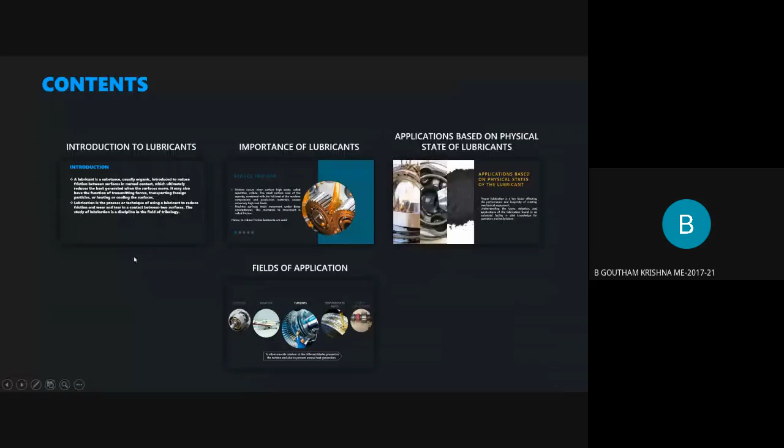So, first of all, what is lubricant? It is a substance, usually organic, introduced to reduce friction and wear between two mating surfaces. It also has other functions such as transmitting forces, heat absorption, etc. And lubrication is a process or technique in which we use a lubricant to reduce the friction and wear.

Coming to the importance of lubrication, first one is reduce friction. Friction occurs when two surfaces with asperities collide. The small surface area of the asperity along with the load of the mating surfaces create extremely high loads and they resist the movement. This is called friction. In order to reduce this friction, we use a lubricant. When there's a lubricant film present between two surfaces, as one surface slides over the other, the lubricant gets sheared off, and there'll be free movement, and there'll be no friction or very less friction.

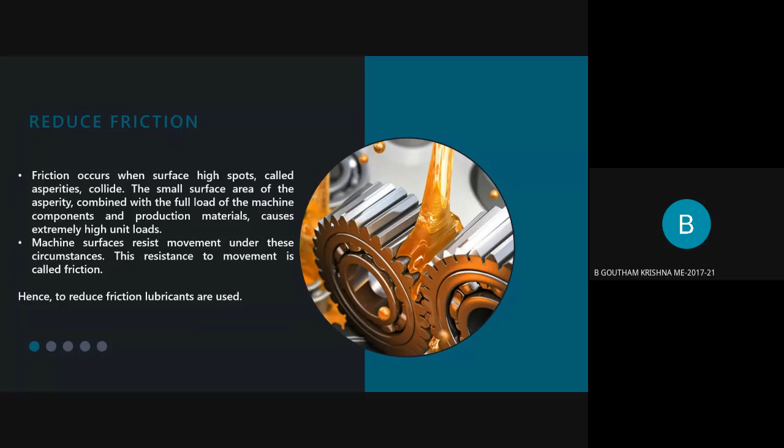As we know that when two surfaces interact with each other at high speeds, they are bound to wear, and this causes very small particles such as asperities to be formed on the surfaces that are formed when they are subjected to cutting, tear, fatigue, and weld. So this surface to surface mode occurs at a microscopic level, and at high speeds, the asperities wear off the top layer of the surfaces of the moving parts. So we use a lubricant so that the wear is reduced, and the period of the moving parts is prolonged.

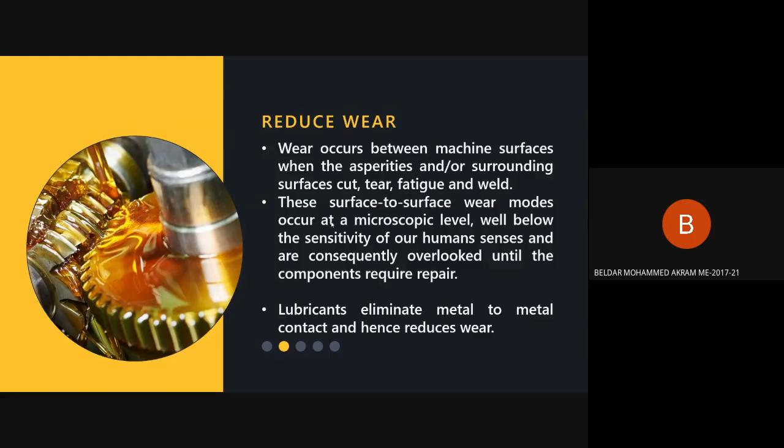Remove heat. Lubrication reduces the heat generated when two surfaces are in motion. It smooths the process by forming a film between two surfaces, thus reducing the friction and also improving the performance and efficiency.

To remove contaminants, lubricants are used as a circulation system which have benefits of carrying away the internally generated debris and external contaminants that get introduced into the system to a filter where they can be removed. So lubricants for machines that regularly generate debris or contaminants, such as automotive engines, typically contain detergent and dispersant additives to assist in debris and contaminant removal.

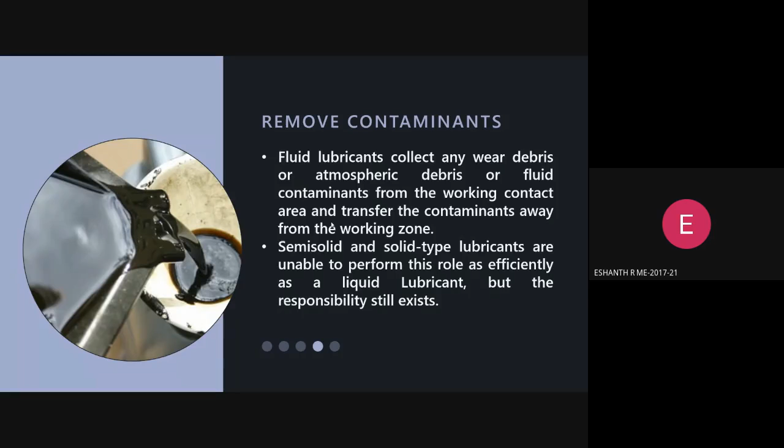In some moving parts you have a high concentration of chemicals. These concentrated chemicals usually cause corrosion. To prevent corrosion, by chemical corrosion or by high heat generated, the metals tend to get corroded. So to prevent corrosion, new lubricants are used, and these lubricants make sure that the corrosion doesn't happen by action of moisture and mild production environments. But the issue with this is if the lubricant is continuously used, once it ages, the lubricant itself tends to become corrosive. So the lubricants have to be changed now and then.

Coming to the application parts of lubricants. Eshanth, can you come back to the other slide?

Application based on physical state of lubricants. As we all know, proper lubrication is a key factor affecting the performance and longevity of any mechanical equipment because they have higher temperature and the revolving speed is very high. The moving parts of industrial machines experience a large amount of stress as part of their everyday operation. So one of the main factors that allow equipment to operate under such extreme circumstances is the lubrication, which is used to reduce friction between the moving surfaces. Now we'll look at the types of lubricants.

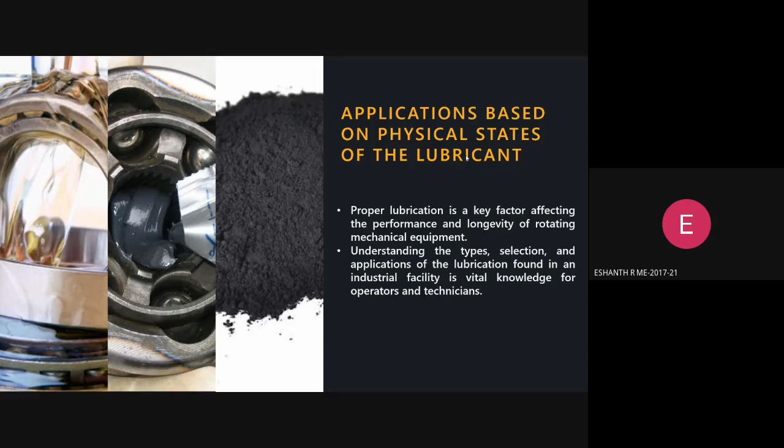Along with their applications. So the first type are liquid lubricants, also called oils or lubrication oils. There are several types of lubricating oils used in industrial applications, each having their own advantages and disadvantages.

First is mineral oils. Mineral oils are composed of a complex mixture of hydrocarbons and are produced by processing crude oil or petroleum oil. One of their main advantages is they're produced on a large scale basis, so they're comparatively cheaper.

Next comes synthetic oils, which are man-made using organic chemicals. They have a lot of advantages as they work at both high and low temperatures, with better chemical stability and better resistance to oxidation, etc. But they're slightly more expensive than mineral oils.

Fixed oils are biolubricants, usually made from animal or vegetable sources. They're rarely used on their own, but are majorly used as additives in mineral oils and greases.

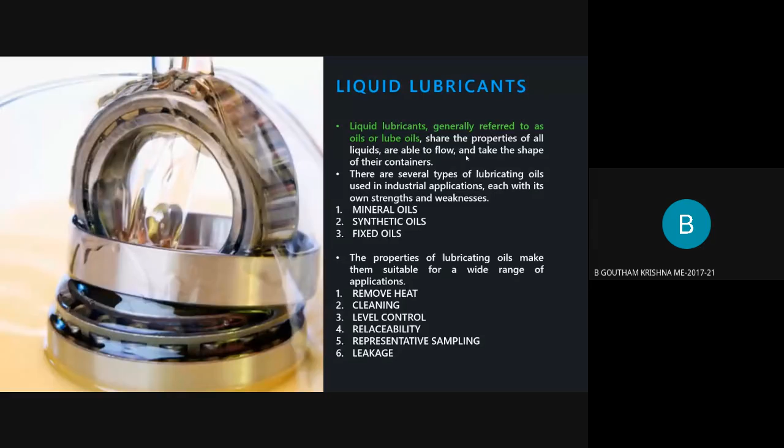Next, the semi-solid lubricants, commonly known as greases. Greases are actually much more preferred when compared to oils because sometimes you want the lubricant to stick to a component, while other lubricants like oil do not actually stick to the parts. So greases will stick to the applied surfaces, even vertical surfaces.

This is independent of a pumping system, unlike oil which has to be pumped into the system. Grease will stick to the component, and it will also make sure the asperities stay inside the boundary layer, which makes sure it doesn't spoil the moving parts or subject them to wear.

And greases are not subjected to leakage because they don't move so freely compared to oil. As they have the name semi-solid, they actually sit inside the moving parts fixed, and they mate the gears as well.

Sealant is also a type of grease that can be packed around the component, which acts as a barrier to prevent contamination of the parts. You can also have a grease chamber, which is not possible for an oil chamber.

These greases are commonly used in automobiles and industrial purposes, as we see them every time, and in construction equipment, which is the most used area for greases. In cables and wires, they're used to make sure they don't get subjected to heat, so that they don't break.

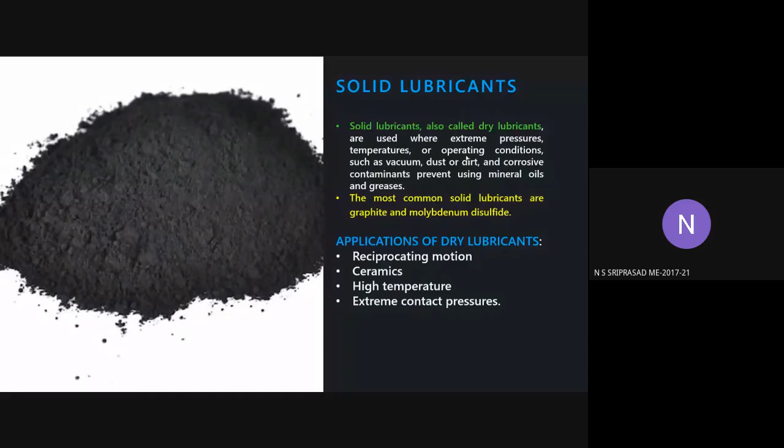Or they are mixed with some industrial alcohol, which is very volatile. So once it's sprayed onto whatever component, the alcohol evaporates, leaving behind the solid dry lubricant there. Applications include reciprocating motion, ceramics, and high temperature areas.

Now moving on to the field of applications.

Turbine lubricants must control the rust and corrosion that can destroy the precise surfaces, and must also resist foaming and air contaminants, which could impair lubrication and lead to equipment breakdown. They should also be easily filterable without additive depletion, and versatile enough to serve as both lubricating oil and hydraulic fluid for various turbine systems.

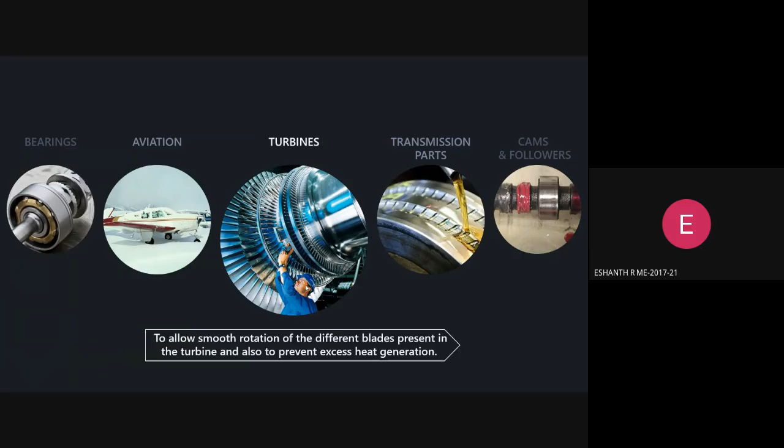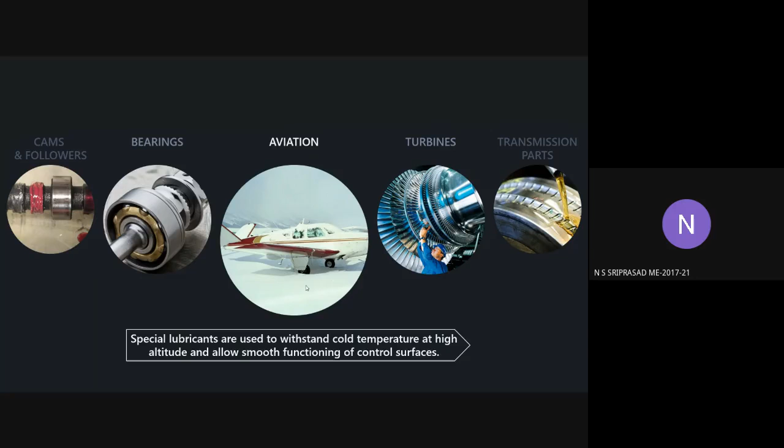Now for planes, since they usually fly at high altitudes where the temperature is really low, most fluids there freeze. To prevent that, you need to choose particular lubricants that, even at low temperatures, don't have a high freezing point—the freezing point should be really low. This way lubricants ensure the smooth functioning of the actuators for control surfaces such as the rudder, elevator, and ailerons.

Coming to bearings: all bearings, such as roller bearings, plain slider bearings, or general bearings, usually take up heavy loads, and as a result undergo metal to metal contact, which results in wear. Due to wear, the clearance of the bearings increases, which in turn reduces the load carrying capacity.

In order to eliminate this, we use lubricant. They form a film in between the two metal contact surfaces and reduce wear and vibrations.

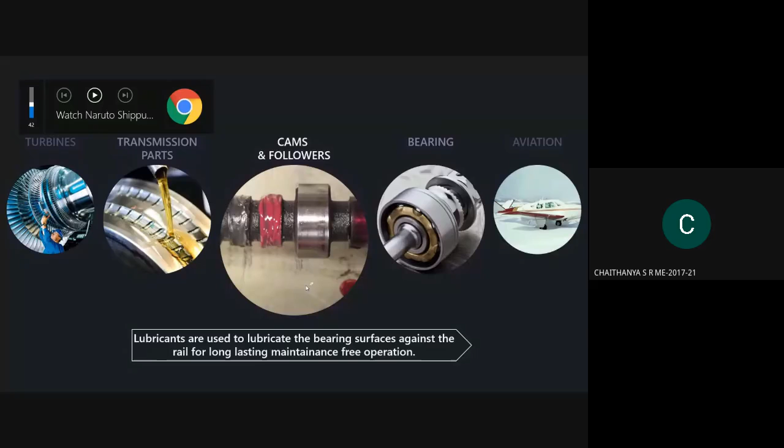Cams and followers are used to transmit rotary motion and reciprocating motion. These components are subjected to jerks in sliding distance, which leads to pits forming on the cam surface. To reduce this, we use lubrication, which reduces abrasive and adhesive wear between the cam and follower. It also reduces temperature and prevents scuffing between cam and follower, removes contaminants, and reduces noise.

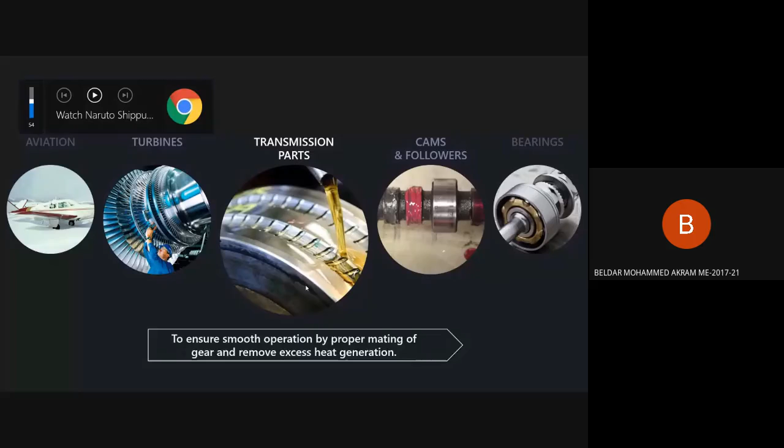Transmission parts, commonly known as the gearbox system, are found in automobiles. In automobiles, we use lubricants known as engine oil, which ensures the smooth working of parts in the gearbox. This reduces friction and reduces internal heat generation of the transmission parts, as an automobile is subjected to constant varying speed at varying time.

A constant flow of engine oil should be present, and since parts are subjected to high temperatures, the viscosity of the oil shouldn't decrease, so it doesn't become too thin. At cold temperatures, the engine oil shouldn't become too hard.

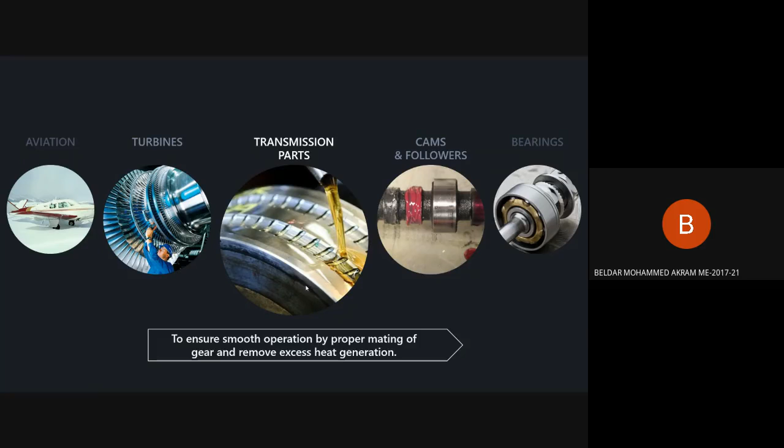These are only a few fields, ma'am. There are other fields also which we couldn't mention, because there are a huge number of fields. That's all, thank you ma'am.

What's your team number before starting, Kanishka? We don't know the number, Sumanth. It's okay, the title is Classification and Mechanism of Wear. Good afternoon to one and all.

So our topic for today is classification of wear and mechanism of wear. The different classifications of wear mechanisms are abrasive wear, adhesive wear, cavitation, corrosive wear, erosive wear, fatigue, and fretting wear. These are the most common types.

Go back to the previous slide just a second. Sorry for disturbing you. I just need to take down the USN numbers: 22, 37, 44, and 51.

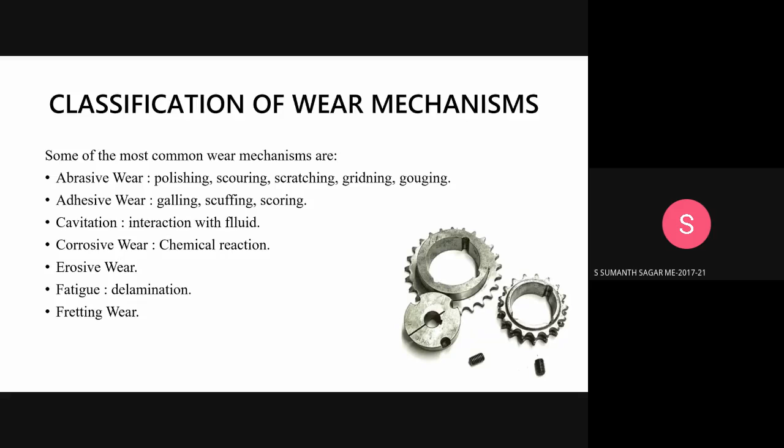Yeah, go ahead. So these are the most common types of wear mechanisms that we see in everyday mechanical components. So coming to adhesive wear.

Adhesive wear occurs when two solids, one of a harder material and one of a softer material, are in sliding contact, and the atomic bonding forces occurring between the materials at the interface are stronger than the strength of the surrounding area in either of the materials.

So basically, there's a harder material and a softer material which are in contact with each other, in sliding contact in this case. So the interface between them, where the two meet, is stronger than the strength of the surrounding area.

And adhesive wear is one of the most frequently encountered types of wear.

In adhesive wear, basically what happens is the shear starts in the weakest material, that is, the wear basically happens in the softer material. Excuse me Sumanth, could you take it a little slow please? Yeah, sorry. In adhesive wear, shear starts in the weakest material, and the fragment of a surface, that is the wear particle, is detached from one body and transferred to another, as you can see in this animation here.

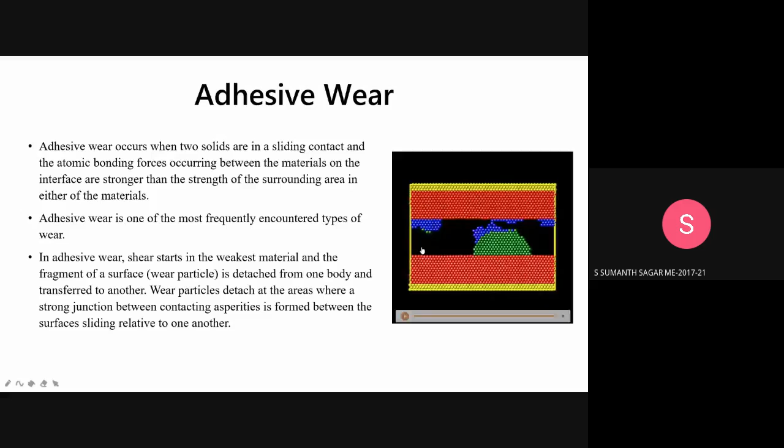So this green substance is the hard material, and the blue is the softer material. What happens here is when these two are in sliding contact, the atoms from the softer material are detached from the softer material and transferred onto the harder substance. So that's what's explained here, and this is how the mechanism basically works.

So if I have to explain the mechanism here: when two materials are in contact, due to the high pressure and stress between them, a micro weld is formed because of the high temperatures in the contacting asperities. These two are basically glued together, and when they slide off against each other, the softer material loses whatever was at the contact point, and this material is transferred onto the hard material. That's what the mechanism is basically saying.

And adhesive wear coefficients of materials are between 10 power minus 7 and 10 power minus 2, depending on the operational conditions and material properties. This is about adhesive wear.

And moving on to abrasive wear. Prajwal, are you there? Yeah, good afternoon ma'am, I'll be explaining abrasive wear.

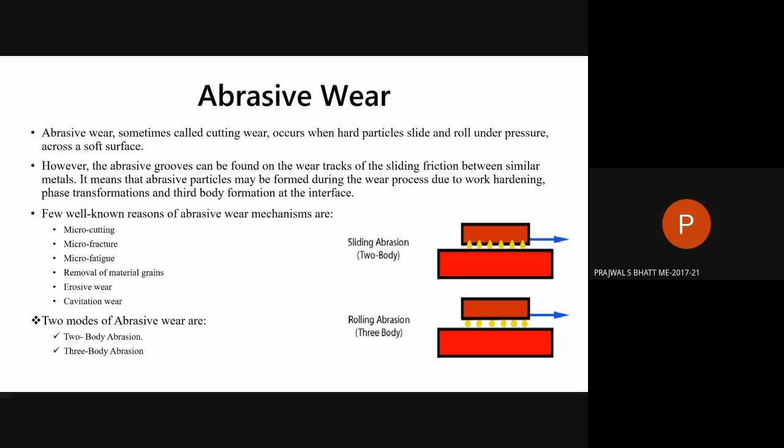The well known reasons for abrasive wear mechanisms mentioned below include micro cutting, micro fracture, micro fatigue, etc. And in abrasive wear, there are two modes of wear. Sumanth, next slide.

The first one is two-body abrasion, which occurs between two materials in contact, and as mentioned earlier, one of them is harder than the other. The normal load applied forces the harder particles to penetrate into the softer surface, which in turn causes plastic deformations. As the harder surface slides over the softer surface, material is removed from the softer surface by microplowing and microcutting, which is one of the most common mechanisms, as mentioned earlier.

And the other mode of abrasive wear is explained in the next slide.

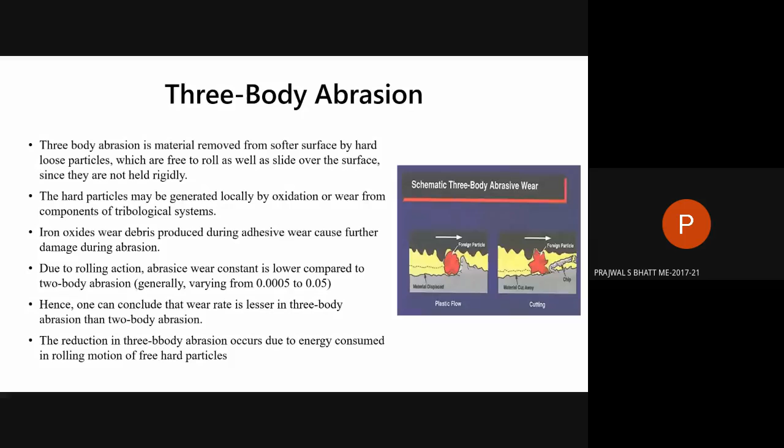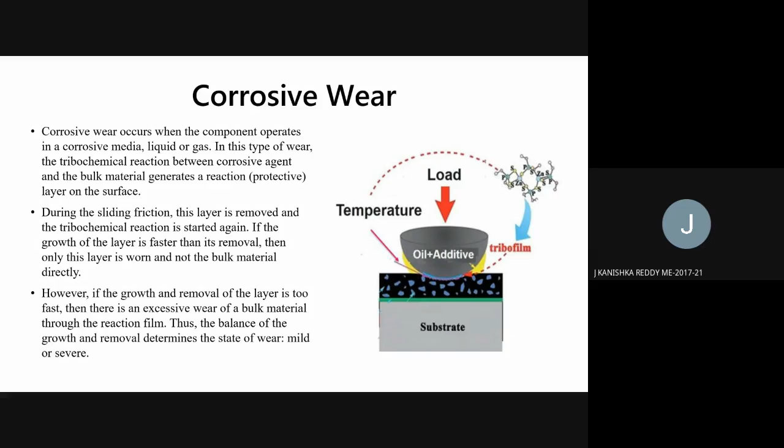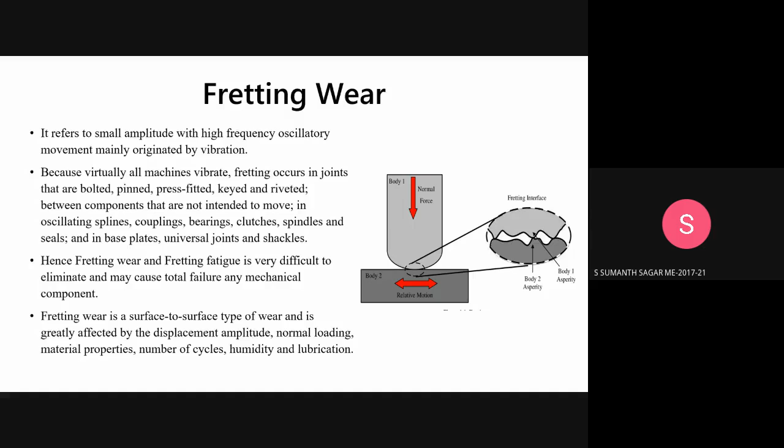Okay, so well presented. Your title was classification and mechanism of wear. So what did you understand by going through this topic and doing your groundwork for your presentation?

We understood the different types of wear and how wear occurs in different materials and how bad of an effect it can have on everyday components that we use. Like even the most robust components we use can go through a bad cycle because of wear. And usually, when people think of wear, they only think of sliding and rolling friction, ma'am, whereas there are these different types of wear. That's what we found out when we did this.

Okay, so now you're aware of all the classifications of wear which could come in when you have some relative motion across the contact area. So again, it depends upon the material. Can you figure out which are the major causes of wear, which is highly impacted across the surface as a drawback, and which could be overcome with the help of lubricants? So can you tell me which are worse in this situation, which have the major impact, and which are minor, associated with the types of wear you discussed currently?

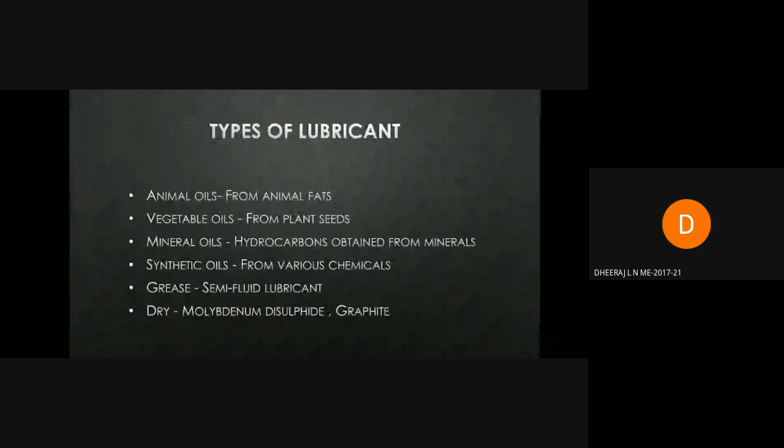Greases, semi-fluid lubricants, dry or solid lubricants, meaning molybdenum disulfide or graphites. Chetan, next slide.

Solid lubricants are also called dry lubricants. These are materials that, despite being in a solid phase, are able to reduce friction between two surfaces sliding against each other without need for a liquid oil medium. The two main solid lubricants are graphite and molybdenum disulfide.

Semi-solid lubricants, which is the most important, means greases, waxes, and other components of oil and fats.

Liquid lubricants are used extensively in applications in terms of speed and load size. Liquid lubricants are the most dominant type of lubricants in the market.

Next, synthetic lubricants, which are chemical compounds that are artificially made. Synthetic lubricants can be manufactured using chemically modified petroleum components rather than whole crude oil, but can also be synthesized from other raw materials. Next, I'm handing it to Anil Kumar.

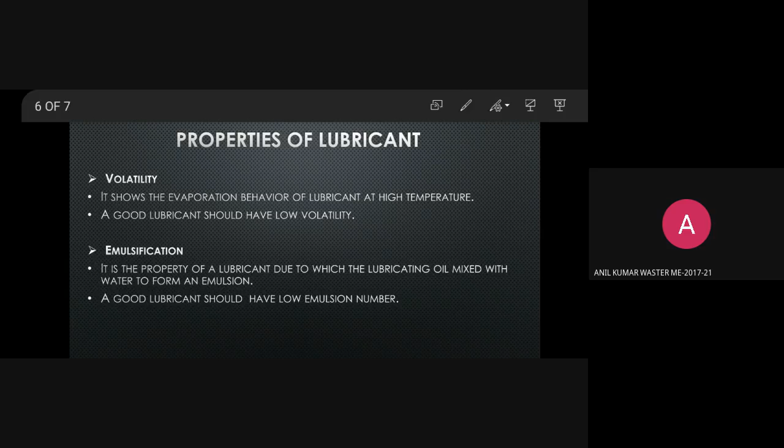Thermal stability. All oils have the tendency to decompose at higher temperature. The ability to resist decomposition due to high temperatures is known as thermal stability. The good lubricant should not decompose during operation at high temperature, and it must be stable towards heat.

The next property is volatility. Volatility is the evaporation behavior of the lubricant at high temperature. When the lubricating oil is used in very heavy machinery working at high temperature, a portion of oil may vaporize, leaving behind the residual oil. This residual oil has different lubricating properties, like increased viscosity. Therefore, the good lubricant should have very less volatility.

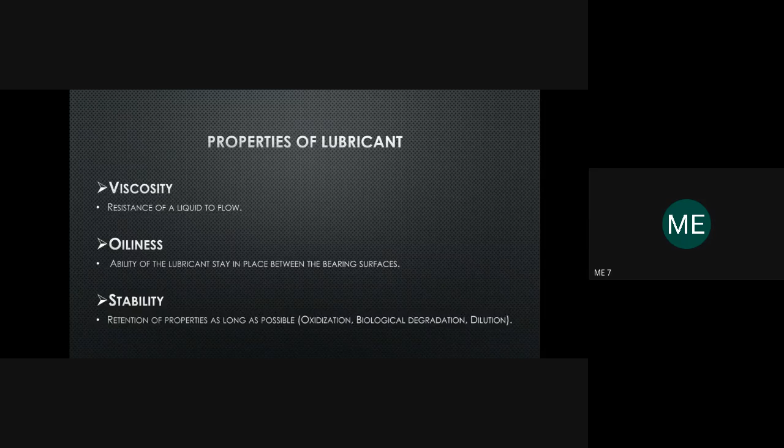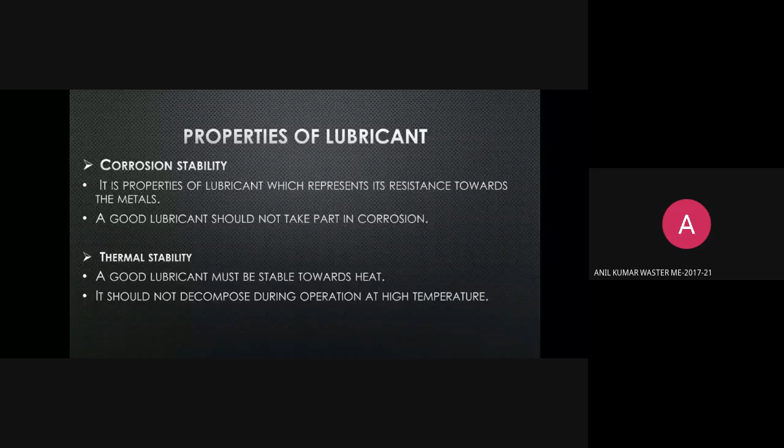There are some key properties, like viscosity, stability, and oiliness. In bearings of automobiles, there will be high load, so we need high viscosity and oiliness of the lubricant.

Still, if you would have had one case study, that would have been better. Try to do a little bit of groundwork further so it provides you knowledge on which lubricant you can select for which type of requirement, as I told you in class with some examples. I thought you would give case studies related to all types of lubricants, which fetches more information for real time requirements, because usually there'll be a huge lot of specifications for every grade of lubricant. So based on your requirement you see whether the specification is mapping and go with that grade of viscosity lubricant. It depends on what set of properties you need for a specific requirement, so based on those properties you select the grade of available viscosity of the lubricant.

Selecting becomes difficult if you don't have scheduled data with you. So if you do the minimum groundwork before purchasing a lubricant, you know the availability mapping as per your requirement, and you can directly go purchase the required lubricant. If you go wrong in selecting the lubricant, even though the design of the bearing is good, the material selection is good, and the load applied is completely bearable, the reliability of that bearing will come down, the life of that will come down. So you should be very careful in selecting the lubricant. These properties and types play a very vital role, so you should be keen enough and go with some real time applications.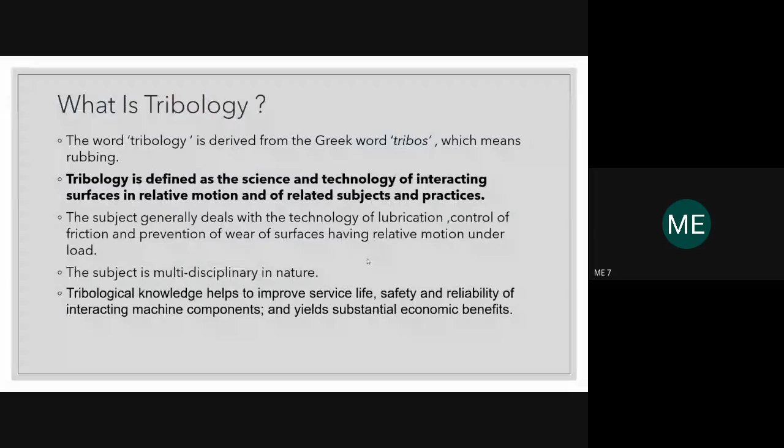Now coming to the question, what is tribology first? Tribology is the science that deals with friction, lubrication, and wear of surfaces which have relative motion with each other. The word tribology comes from the Greek word tribos, which means rubbing.

Tribology is an interdisciplinary subject which has elements of fluid mechanics, solid mechanics, material science, chemistry, and thermodynamics. The knowledge of tribology has led to the development of better materials and lubricants, which help in reducing friction and wear in mechanical and electromechanical systems, which right now are a major bane in our modern society as they lead to inefficiencies and loss of energy.

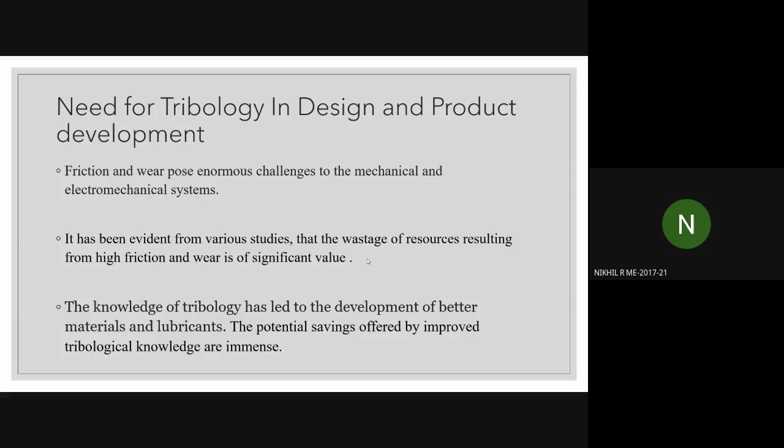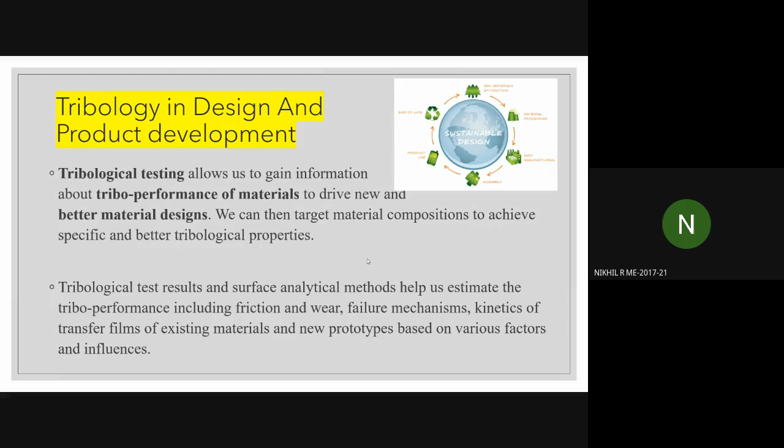Tribology in design and product development: the testing which we do under tribology helps us understand how materials wear on rubbing with each other and how friction acts when two materials have relative motion with each other. This also helps us understand what type of lubricants we need to use in a particular situation to reduce wear and friction so we can get more efficiency and reduce wastage of energy.

Tribology is mostly concerned with optimizing the contact surfaces to prevent wear, and the material used between the contacting surfaces has a major impact on how each surface reacts when force is applied, depending on the stresses applied. The use of friction and wear optimized materials can greatly improve industries as they can reduce the downtime and maintenance required on machines.

Now Balaji will give a brief introduction on the various applications of tribology. Thank you Nikhil. Tribology plays a very big role in our day-to-day lives, with applications in various fields such as automobiles, drilling and hardware equipment manufacturing, biomedicals, aerospace, aeronautics, racecrafts and many other fields. The main application of tribology in design comes down to bearings, gears, cams, brakes, and seals.

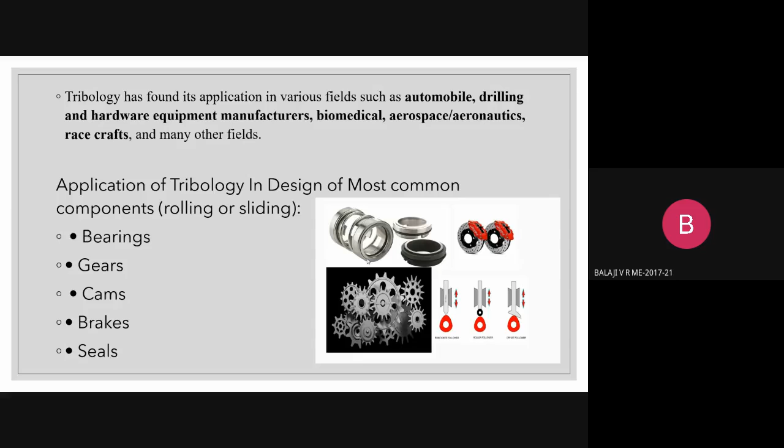Talking about bearings, in mechanical systems, bearings are used for supporting various rotating elements like shafts, etc. A special feature of journal bearings is that it makes metal to metal contact only in two conditions: at the start of rotation and at the end of rotation. Only in these two conditions does wear of journal bearings occur and is maximum and significant. Often such failures occur in absence of sufficient lubricant hydrodynamic film thickness due to relatively low speed.

Learning tribology cultivates an understanding that at low speeds, the main purpose of oil is lubrication, and high viscosity oil will be preferred to low viscosity oil. While at high speeds, the major purpose of oil is to act as a coolant, and low viscosity lubricants are preferred to carry away frictional heat of operation. Here, lubrication is a secondary consideration.

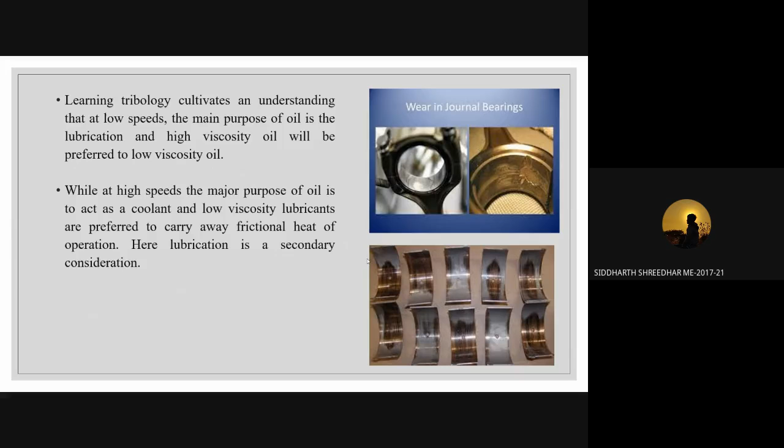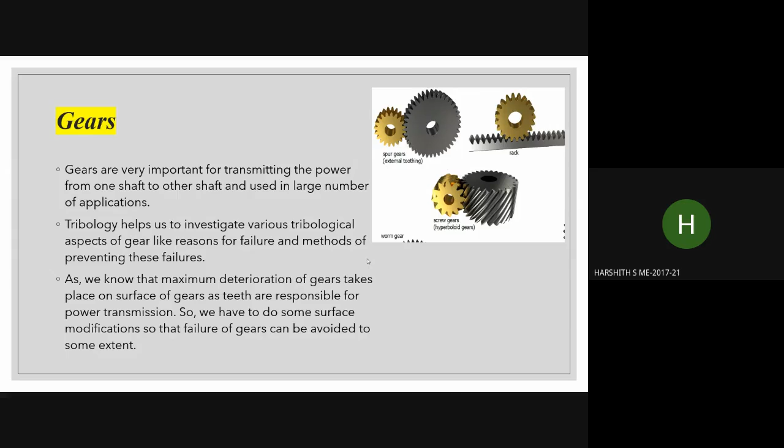Gears are very important for transmitting power from one shaft to another. Tribology helps us investigate the various tribological aspects of gears and the reasons for failure, and preventing these failures. As we know, maximum deterioration of gears takes place on the surface of gears as teeth are responsible for power transmission.

Gear failure takes place when the teeth lose their shape. Major causes of gear failure are friction and scuffing, and this can be avoided by using lubricants or harder gear profiles or different coatings on the gear tooth.

So cams are components that are used to transmit rotary motion into reciprocating motion. These components are subjected to many cycles of usage and tend to fail with increasing usage. One such failure is pits formed on the cam surface. These pits can increase noise pollution and reduce mechanical efficiency to a greater extent. Tribology as a subject helps us realize what are the limitations of such components and helps us increase their efficiency in any way possible.

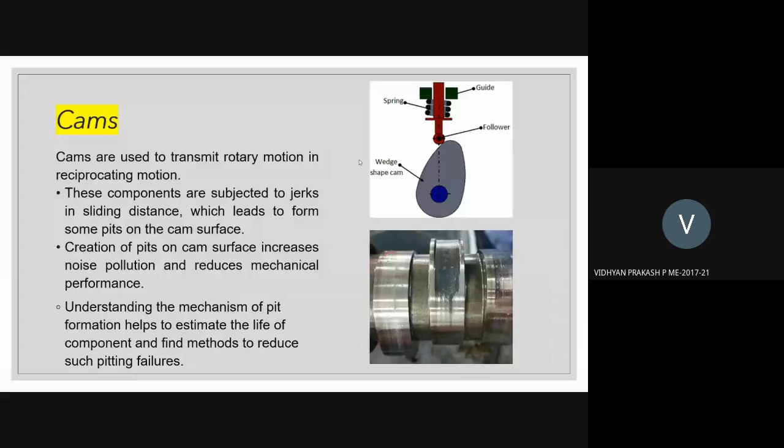Mechanical seals are devices that join systems or mechanisms together and prevent any kind of leakage, or protect the system from any contamination. The effectiveness of a seal is dependent on adhesion in the case of a sealant and compression in the case of a gasket. The possible failures are adhesion wear in the case of sealant and failure of the gasket. Tribology helps us understand these causes of wear and prevent them, and hence increase its efficiency.

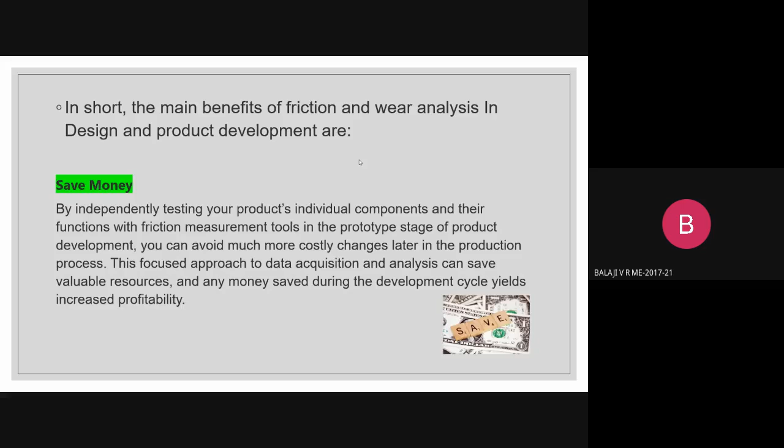So, in short, tribology is very important in our lives, and there are many benefits. Some of them are saving money. In any industry, money is of utmost importance, so if someone does frictional analysis on a prototype before the product is even developed, we can save a lot of money by solving any problems that occur. It'll also help save time because frictional analysis provides fast, accurate, and reliable measurements, and helps manufacturers develop their product quicker. Product quality can also be improved because we can see where wear is increasing and improve the product while still in the prototype stage.

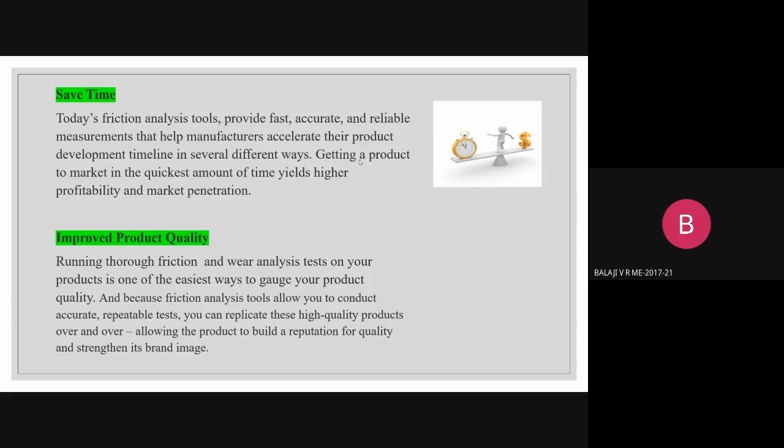As we do frictional analysis, we can also improve and get to know about our product. As we keep developing, we'll have a lot of product knowledge, which will help us streamline the product and, at the end of the day, make something better for society. Thank you.

Hello. Okay, it was a good effort from your end. I think the title was Importance of Tribology in Design and Product Development, right? So what knowledge did you gain? What is the basic importance of tribology if you want to design any new product? Suppose you want to design a new pen as per some innovative concepts, what is the impact of tribology on designing a new pen? Can you give me an example for this?

Mr. Balaji was very happy in presenting. Can you please answer me now, so that even I'll be happy? Yeah, Ma'am, as Balaji explained in the last slide, there were four main benefits of this in product design and product development.

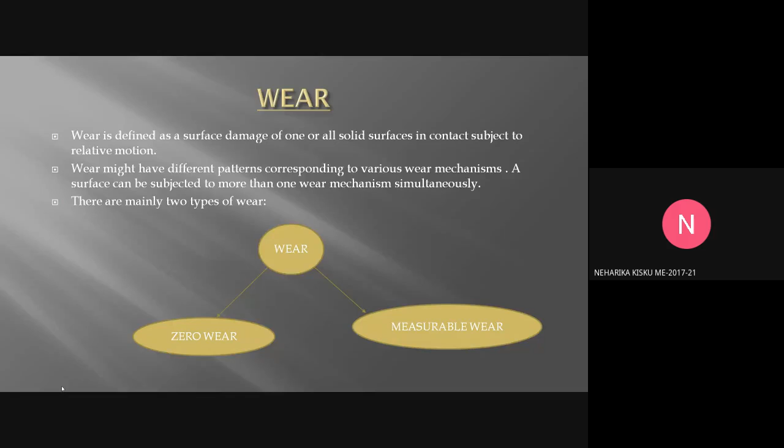Zero wear is basically a polishing process in which the asperities of the contacting surfaces are gradually worn off until a very fine smooth surface develops. It may increase the performance, or it can be considered as a desirable one.

Let's understand measurable wear. It can be a removal of material from the surface that increases vibration, noise, or surface roughness, and this may be treated as measurable wear. Often we measure wear in terms of volume or mass reduction. The undesirable removal of materials occurs in measurable wear.

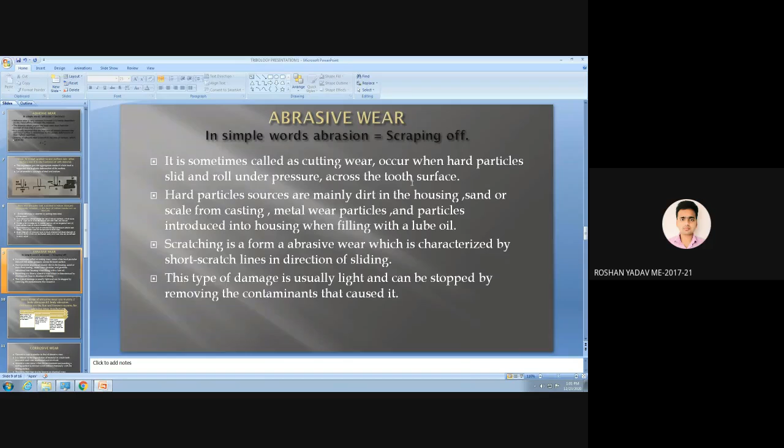We can observe this when we take the example of a rolling bearing. While in a rolling bearing, if we take lubrication and with the lubrication some particles are going into the bearing, it may start damaging through wear.

Scratching is a form of abrasive wear which is characterized by short scratch lines in the direction of sliding. This type of damage is usually light and can be stopped by removing the contaminants that caused it. The basic modes of abrasive wear are mainly of two types, two-body abrasion and three-body abrasion, which was covered by another group, so we didn't talk much about that.

Following are a few well-known reasons for the abrasive wear mechanism. Micro cutting: sharp material cuts the softer surface, and the cut is removed as wear debris. Micro fracture generally occurs in brittle materials; fracture occurs due to merging of a number of smaller cracks. Micro fatigue: when a ductile material is rubbed by a blunt piece, the surface is repeatedly loaded and unloaded, and the failure occurs as fatigue.

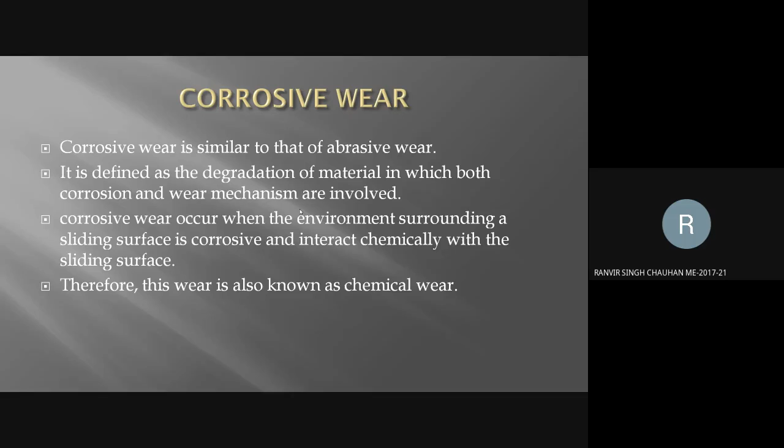Corrosive wear is similar to abrasive wear. It is defined as the degradation of material in which both corrosion and wear mechanisms are involved. Corrosive wear occurs when the environment surrounding a sliding surface is corrosive and interacts chemically with the sliding surface. Therefore, this wear is also known as chemical wear. Roshan, next slide.

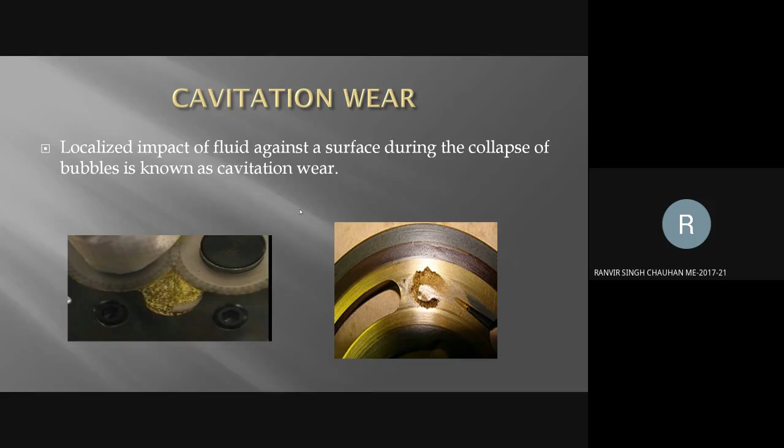Now, cavitation wear: the localized impact of fluid against a surface during the collapse of bubbles is known as cavitation wear. Now, erosive wear: the damage produced by sharp particles impinging on an object is called erosive wear. Particles in water eroding the rocks over which a river flows, or the erosion of both rope and stone pulley when the rope continuously slides over the pulley, are some common examples of erosive wear.

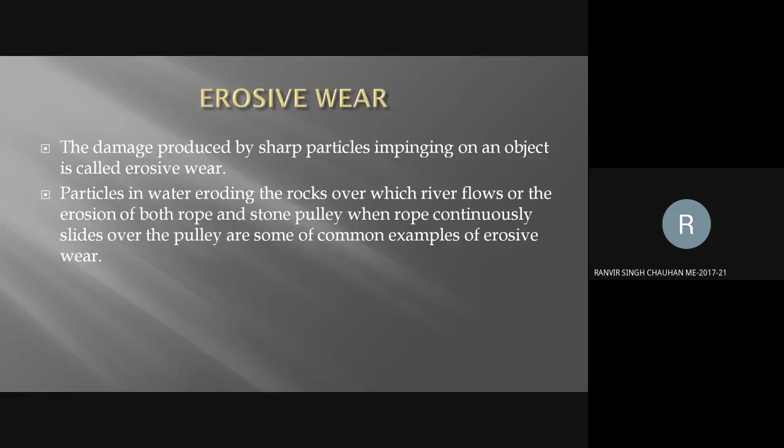Now fretting wear. Fretting is a small amplitude oscillatory movement that occurs between contact surfaces which are usually nominally at rest. One of the immediate consequences of this process in normal atmospheric conditions is the production of oxide debris. Hence, the term fretting wear or fretting corrosion is applied to this phenomenon.

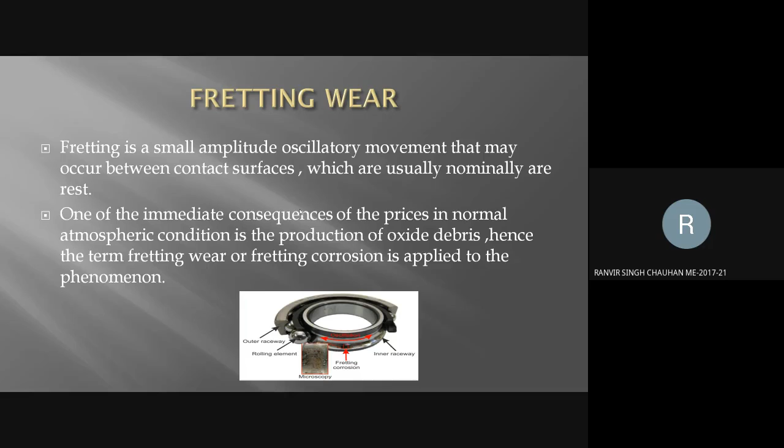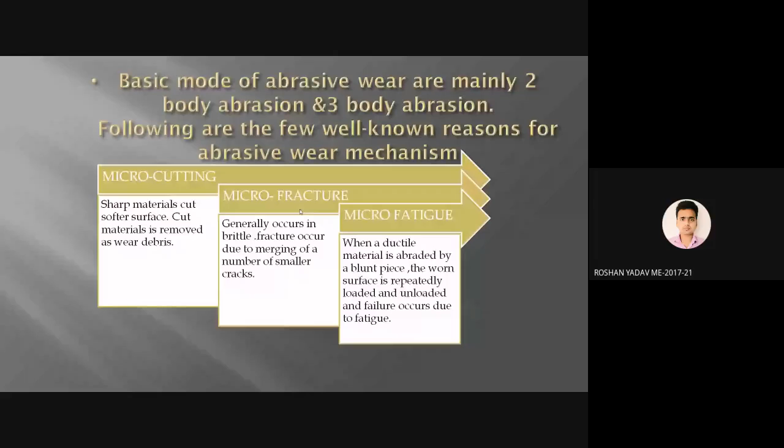Okay ma'am, first of all, adhesive wear is very common in metals because of the property called adhesion, which exists in the material, and it is heavily dependent on the metal affinity between the materials. The theories we studied for wear rates start from the concept of true area of contact. It is usually assumed that the true area of contact between two real metal surfaces is determined by the plastic deformation of their highest asperities. Also, the severity of adhesive wear is determined by the area of contact, which is given by W by H. Roshan, can you move to the next slide?

W is the load applied to one surface over the other, and H is the hardness of the soft material. Taking an example where one material is indium and another is steel or brass, the brass is the contact material. A load of magnitude W is applied over the surface of the indium metal. As the load is applied, heat is generated between the materials, and some transfer of material takes place between the steel and indium metal, creating a bond between these two metals.

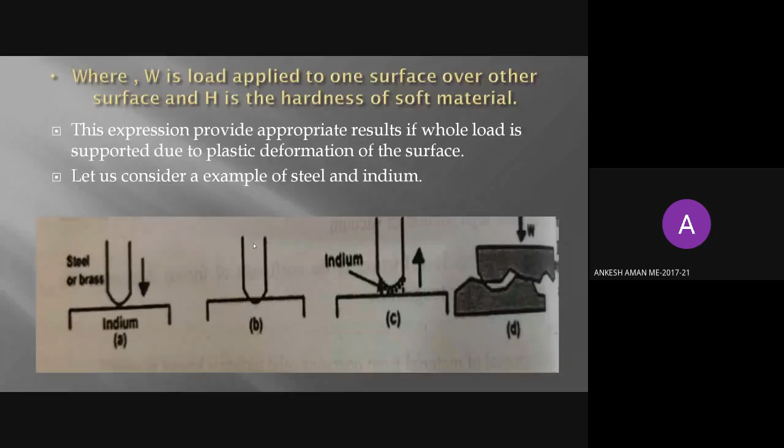Fine, what knowledge did you gain from this? Is there still something to present? No ma'am, it's over now. Okay.

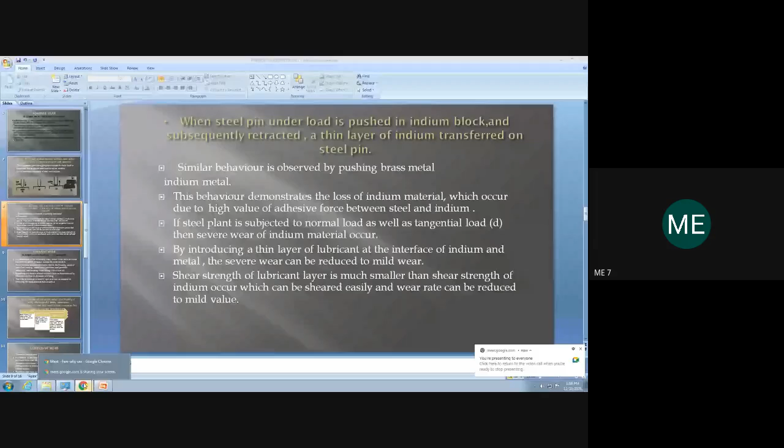This title was presented by the other batch as well, so what knowledge did you gain by knowing about the classification and mechanism of wear? Which type of wear do we get to know are the worst and which could be overcome? Just speak about that.

Ma'am, here we get to know abrasive and adhesive are the most common, and the one which is useful is zero wear, because after some time the roughness is gone and a smooth surface is produced.

Which is the most worst affected one? Which is the major type of wear? Abrasive and adhesive. Okay, so any precautions you can take to reduce this type of abrasive erosion?

Yes ma'am, we can apply oil and grease to reduce the abrasive wear and adhesive wear.

Anything related to the type of material you will have? If you select a proper grade of lubricant, can this part of it be reduced somehow?

We can also select a harder material, ma'am, which has more hardness property. Exactly, the material which has more hardness. So the material having more hardness property will help to reduce the wear to the maximum extent. So mainly, even though the design is good enough, you should see that you've selected the right material with respect to the right strength and hardness, wherein the wear will come down drastically.

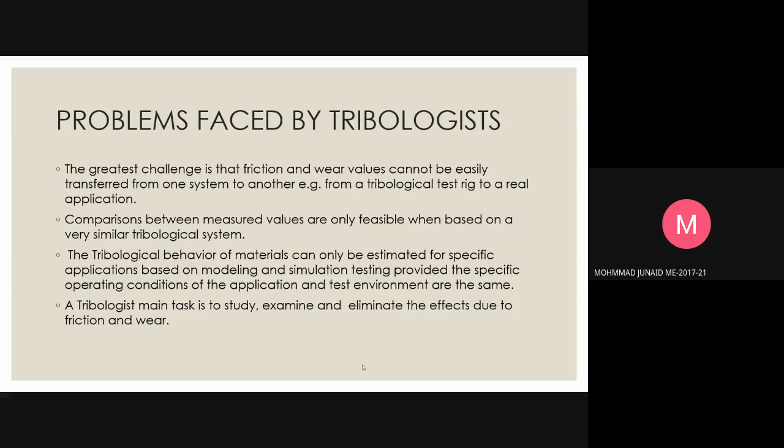Last, the tribologist's main task is to study, examine, and eliminate the effects due to friction and wear. The next scenario of tribology in design will be taken care of by Abdul.

In tribology in design, some applications require low friction, for example bearing materials, while others require high friction, such as brake systems. Study of fluid film bearings, rolling element bearings, seals, gears, cams, and brakes are some of the applications where tribology is required. The basic knowledge gained from the tribology course is useful for industries related to power, steel, cement, oil, etc. Practicing this knowledge in problems ranging from household appliances to large ships earns great economic benefits. The tribology course is often named industrial tribology or applied tribology.

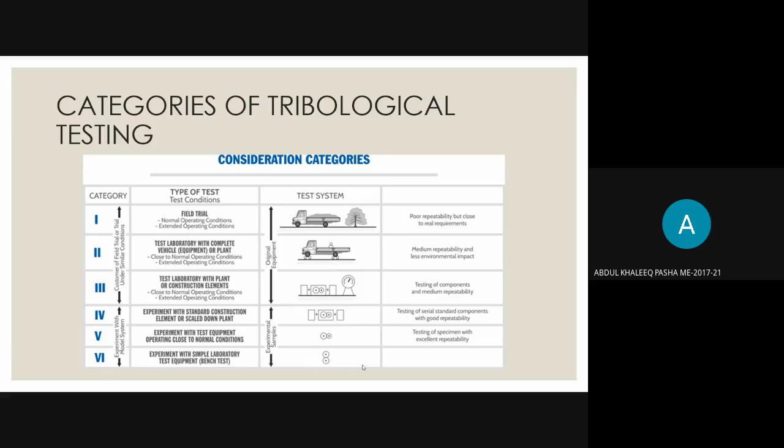The fifth category involves experiments conducted on a specimen with test equipment to deliver results close to normal operating conditions with excellent repeatability. And the last category, a bench test, is conducted with simple laboratory test equipment.

The next part will be carried by my friend Vivian. Now we're going to talk about how we apply these test categories to a sub-tribo system: bearings.

Tribological testing of bearing materials can be divided into four main categories: product performance descriptions, which would include categories 3 and 4 to ensure transferability of results; and production manufacturing monitoring, including categories 4 through 6, with category 3 also being a possibility.

Customer-related testing of bearings may include categories 3 through 5, keeping in mind that category 5 is relevant only if the test can be adapted as close as possible to the application.

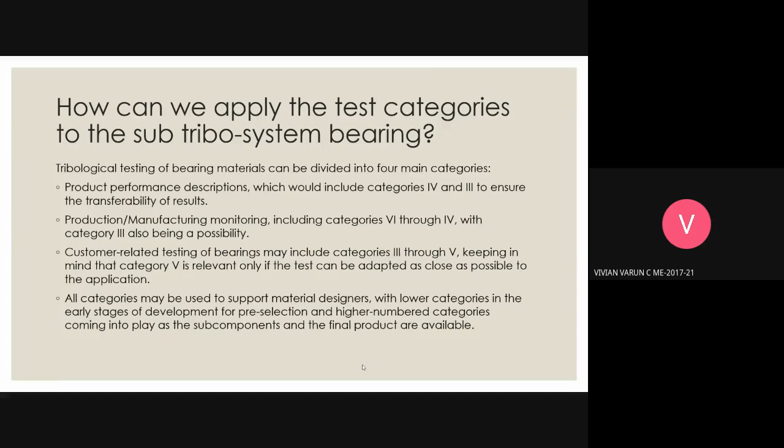All categories may be used to support material designers, with lower categories used in early stages of development for pre-selection, and higher numbered categories coming into play as subcomponents and the final product become available.

In conclusion, this tribological system is composed of collective stress operational inputs, system structure, and functional and loss outputs. The collective stress includes technical and physical load parameters, including load, sliding speed, and duration, along with the movement and temperature conditions stressing the system structure.

The system structure is determined by the property profiles of the substantial elements, including the base, opposing body, the ambience, and the intermediate medium. Tribology shows us that it is an important aspect in product development and design. Thank you.

So what knowledge did you gain overall by doing this work, Abdul, ma'am and team? Initially, what we found out was that tribology isn't just one field, but an application-based field where you can apply it in almost n number of fields, as we have defined in the introduction.

We also found out what it takes to become a tribologist and what types of problems you face, since engineering's main importance is to solve problems. We found out the problems faced by tribologists, and based on this, how they are categorized and how to solve these kinds of problems in design.

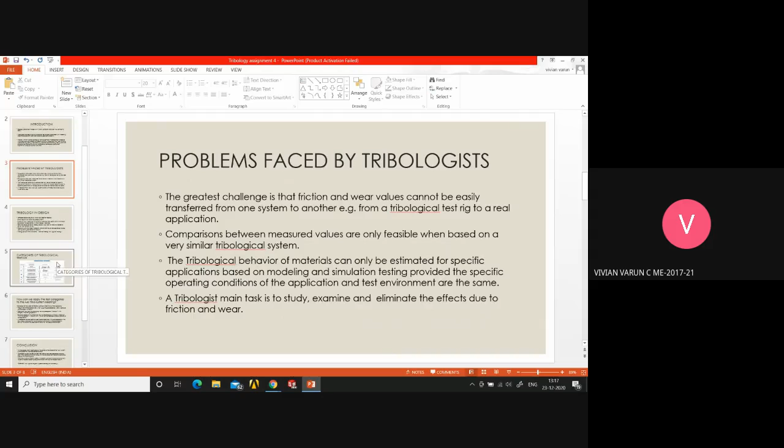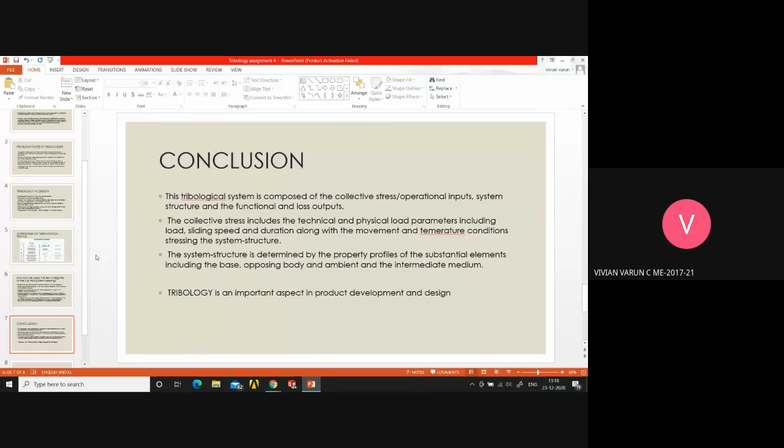We found out there are six categories, and in these six categories we found the different levels of testing, with six being the easiest and most repeatable, and category 1 being the most difficult. It also shows us the real time application map. Using an example of a tribo system bearing, we found out how to apply these test categories and explained it to you. In conclusion, we told you why tribology is important, what parameters are important, and everything else to consider during the design and development phase of a product. So that is what we found during our experimentation.

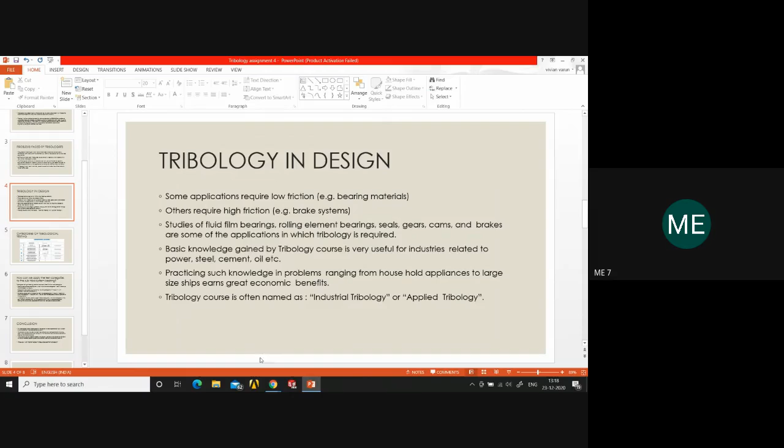Yes, so it is neatly presented. You have done your groundwork. You were able to identify the problems faced in actual practice by some tribologists, so that is a good effort. Later you spoke about the other available categories and options. That's fine, and you have done proper work as per the title given. So appreciate the work done by you guys. Thank you, ma'am.

Even though the title was the same, you presented it in a different way. Have you referred to some case studies or research papers as well? Ma'am, we tried to refer to some research papers, but they were all requesting access, so we didn't have enough time to do it. If you give us another chance, we can try it out, ma'am.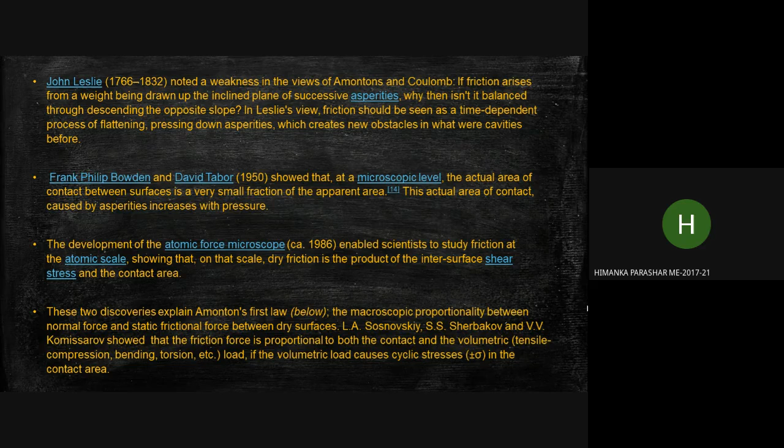Other scientists, L.A. Sosnovskiy, Sherbakov, and Komissarov, showed that frictional force was proportional to both the contact and the volumetric load, if the volumetric load caused cyclic stresses.

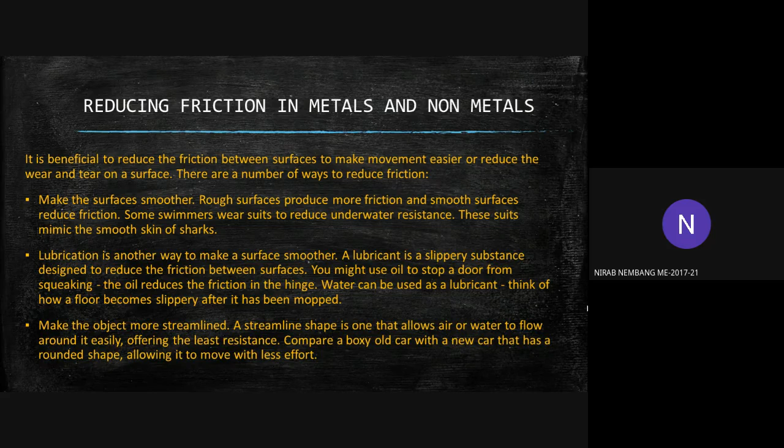Friction can be reduced by reducing the forces acting on the surfaces. The stronger the force acting on a surface, the higher the friction, so reducing that force will also reduce friction. For example, if we apply the handbrake while trying to drive, the car will have a lot of difficulty moving because of the force it applies on the wheels. When we release the handbrake, the wheels move more freely because there is no force acting on them.

Friction can also be reduced by reducing the contact between surfaces. For example, if we try to roll a cube versus a sphere, spheres are the best shape for reducing friction because very little of a spherical object is in contact with the other surface. Wheels such as skateboard wheels contain small spheres called ball bearings to help reduce friction between moving parts. We can also witness this effect by comparing the friction of sliding a book on a table versus doing the same using marbles between the book and the table surface. We notice how the marbles act as ball bearings, helping to reduce the friction between the surfaces.

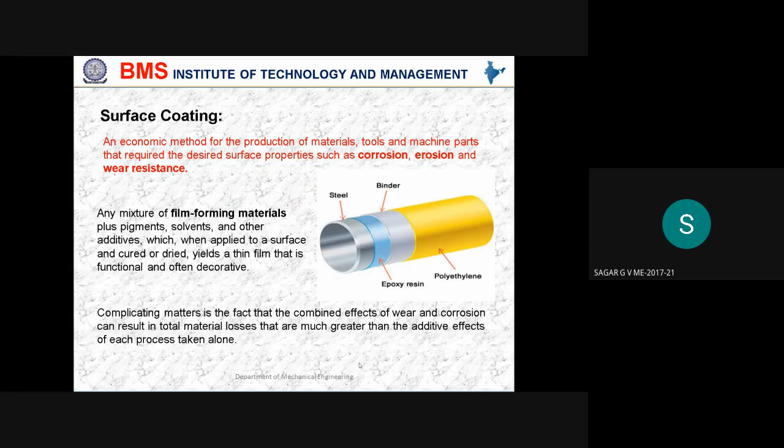Importance of coatings: it is required to achieve desired characteristics, and it helps in surface modification. Moreover, coating provides higher melting temperature, maintains high hardness and strength at elevated temperatures, better erosion and wear resistance, and higher resistance to corrosion and oxidation. Rest will be carried on by the other two members.

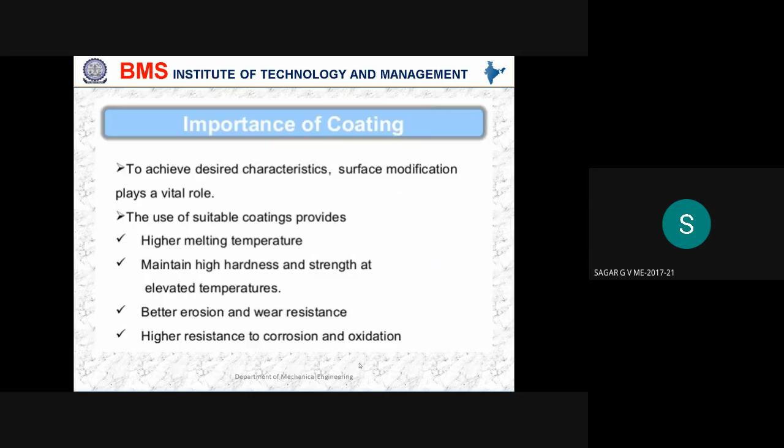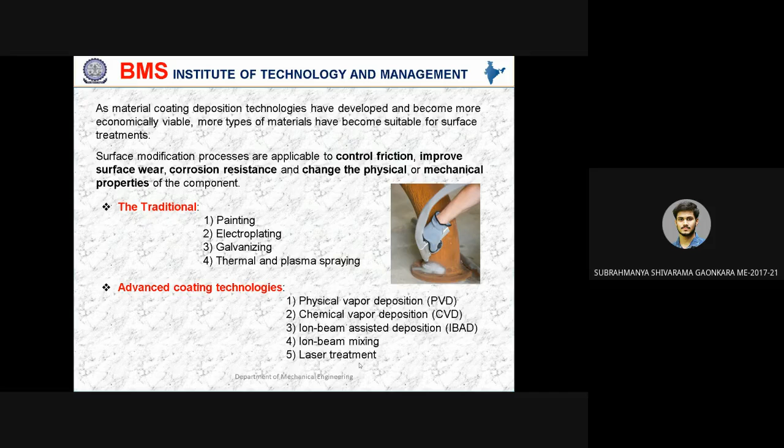Presence of old coatings will affect the present coating conditions. As materials coating deposition technologies have developed and become more economically viable, more types of materials have become suitable for surface treatment. Surface modification processes are applicable to control friction, improve surface wear, corrosion resistance, and change the physical or mechanical properties of the component. The traditional methods are painting, electroplating, galvanizing, thermal and plasma spray. Advanced coating technologies are physical vapor deposition, chemical vapor deposition, ion beam assisted deposition, ion beam mixing, and laser treatment.

Advances in physical and chemical vapor deposition processes and the advent of direct energy techniques like electron and laser beam processes have yielded new possibilities for a wide range of coating specifications, such as hot-dipped zinc coatings, which provide excellent protection of steel from atmospheric corrosion.

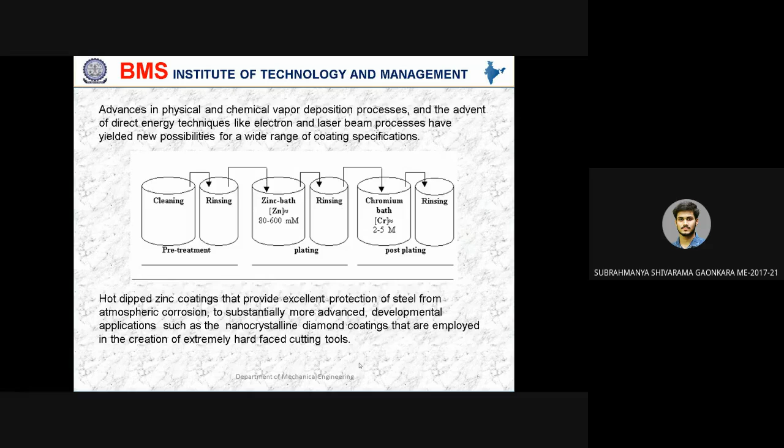Advanced applications such as nanocrystalline diamond coatings are employed in the creation of extremely hard-faced cutting tools. Next will be continued by Pavan.

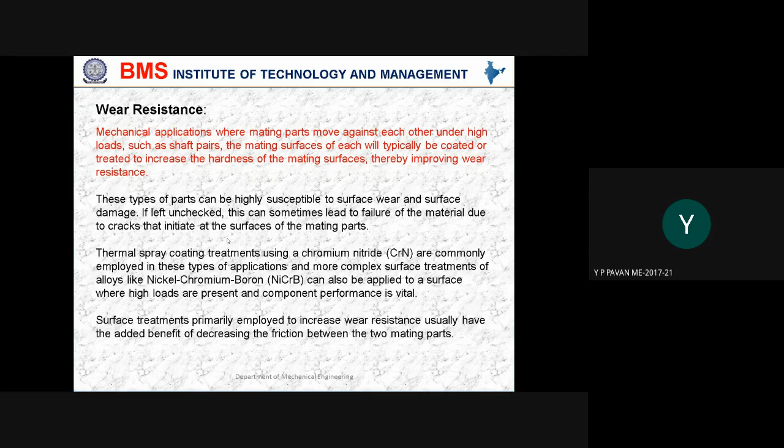So generally, we employ thermal spray coating treatments in order to improve the wear resistance properties. We can use chemicals like chromium nitride, nickel chromium boron, on the surfaces so that they improve the wear resistance of the material. So the surface treatments primarily employed to increase wear resistance will have added benefits of decreasing friction between the two surfaces.

These coatings create an exceptional finish with a very low surface roughness value, and hence the friction between the parts will be as low as possible.

Now going on to corrosion or oxidation resistance, the surface treatment process is employed to protect the surface from corrosion when it is used in a chemically hostile environment. The most commonly used process is the hot zinc plating process in order to protect the surface from corrosion.

And we can use some other coatings such as thermal spray coating processes in order to improve the corrosion resistance properties of the material.

There are different ways to control the corrosion of the material: altering the metal by alloying, that is, we can use highly alloyed and expensive stainless steels rather than using plain carbon or alloy steel.

And by changing the environment, we can control the electrochemical potential by the use of cathodic or anodic currents. We can also use some organic or inorganic coatings to control corrosion of the materials.

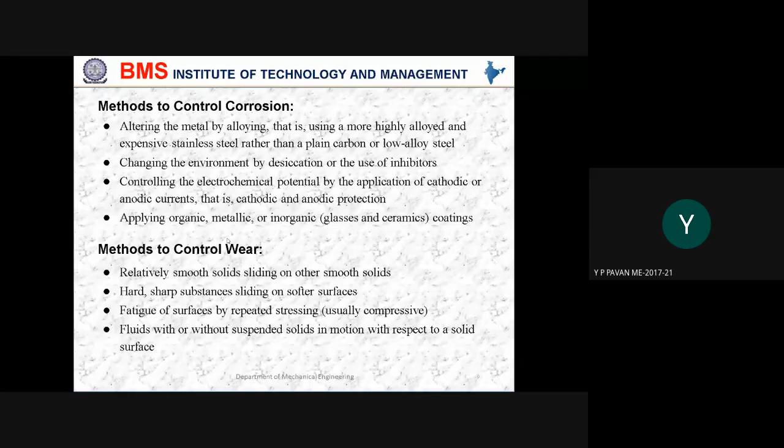The different methods to control wear are: making relatively smooth solids slide over other relatively smooth surfaces, making hard or sharp substances slide on softer surfaces, fatigue of the surfaces by repeated stressing, and fluids with or without suspended solids in motion with respect to a solid surface.

So this completes the presentation. Thank you. Okay, so what is the knowledge you guys got after doing this work?

With surface coating, we can improve wear and corrosion resistance.

Yeah, so in what way, can you just tell in simple words? Usually when we coat the surfaces, they improve the hardness of the materials, ma'am. So by doing that, we can improve the resistance properties, ma'am.

Yeah, so you have different surface coating techniques also. You have to think about which is the best coating technique required for a particular application. Based on that, you go further with coating, wherein you can reduce the wear and corrosion, which usually come into picture when it is in contact with another surface with respect to the open atmosphere.

Okay, so what about the teamwork? Yes, ma'am, we did it all together, ma'am.

Did you refer any case studies or some research papers related to surface coating?